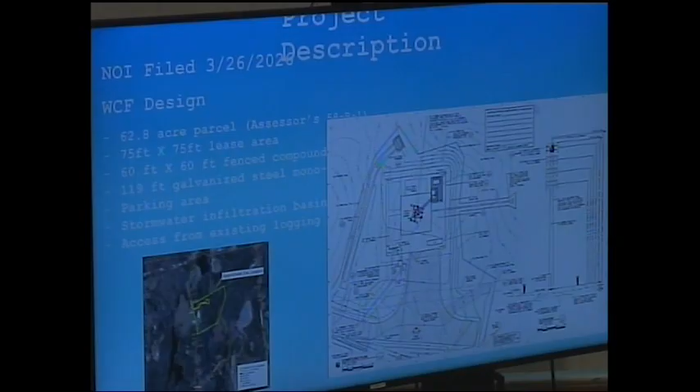Go back, sorry, looks like the spacing's all messed up here, but you should have had this NOI filed a couple weeks ago on the 26th of March. It is for an approximately 63-acre parcel, assessors number 58B1, proposing a wireless communication facility located within a 75 by 75 foot lease area.

It will contain a 60-foot by 60-foot fenced compound area with a security fence with a 2-foot barbed wire topping. Inside that compound area will be about a 119, 120 foot tall galvanized steel monopole structure with the wireless communication antennas. The compound area will also include parking area, a stormwater basin, and access into the property in the lower corner here along an approximately 990-foot existing logging road that we're going to utilize to get into the proposed site.

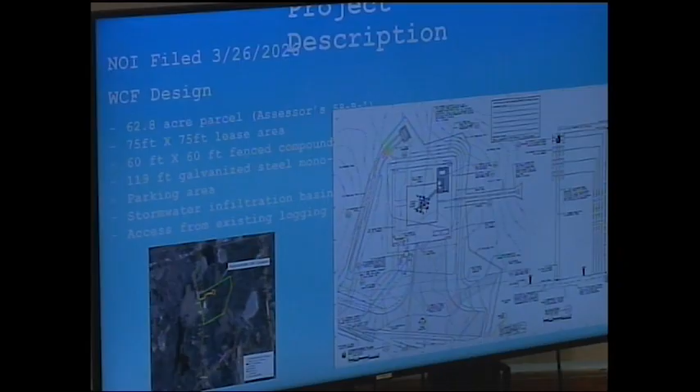Yeah, it'll be widened to about 12 feet, and then the surface will be prepared in order to handle construction equipment and access for maintenance and operation during the life of the facility. So there'll be some minor grading, but not significant amounts.

What is the expected life of the facility? Well, that's a question I've never been asked in doing this for 30 years. I would imagine 50 to 100 years. It's a galvanized steel tower that has a pretty significant concrete foundation.

It's a buffer zone only project, no impacts to resource areas, only buffer zone impacts.

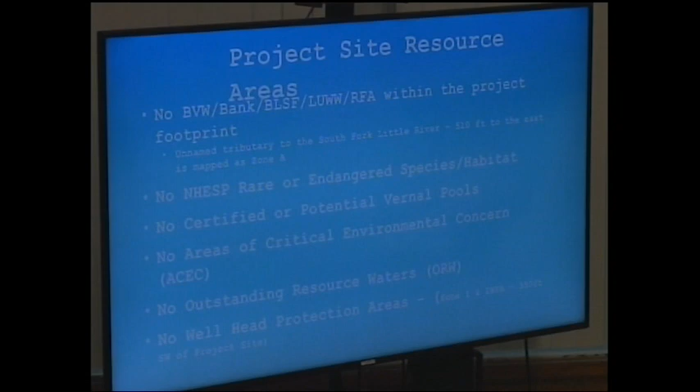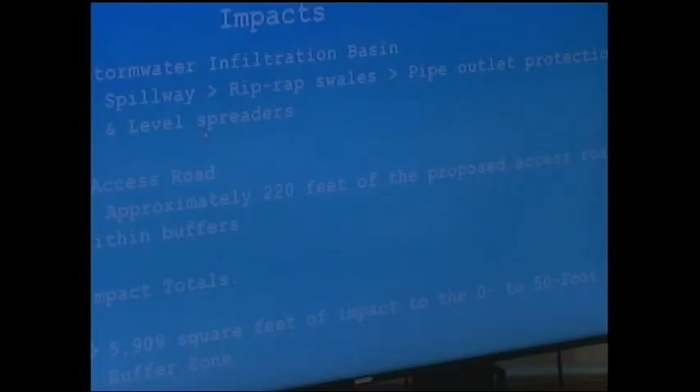Stormwater basin involves spillway, riprap swales, and pipe outlet protection, and a series of level spreaders to diffuse that potential outflow. That's the main infiltration basin impacts, and then of that 990 feet of access road that we're going to be using, the existing logging road, about 220 feet of that is within the buffers.

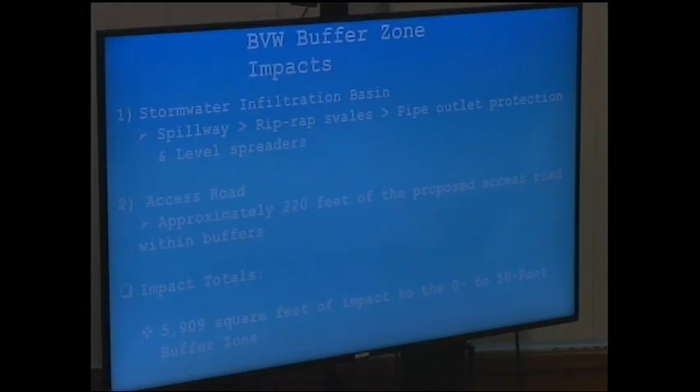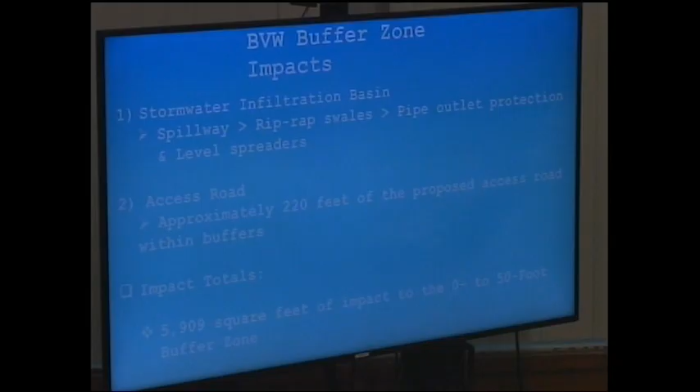So our total BVW impacts for the project, a little shy of 6,000 square feet, 5,909 in the 0 to 50-foot buffer, and 6,492 feet in the 50 to 100-foot buffer.

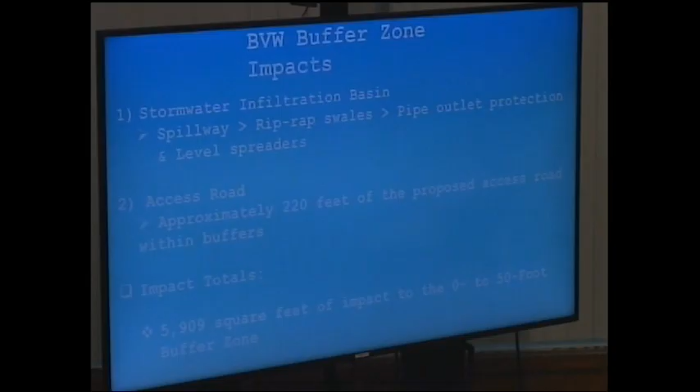What is the total amount of disturbance for the project? Total area is about 64,000 square feet, so it's over an acre. For the grading, that includes the access road and the actual compound facility, preparation for the stormwater basin, and the parking area associated with it.

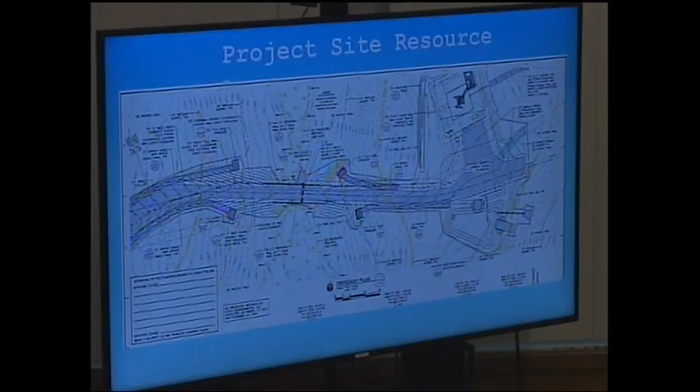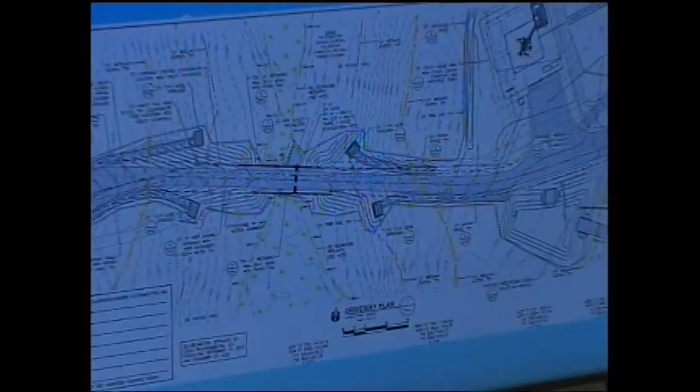Here's a quick site plan. Again, green area is the wetlands, red is the 50-foot buffer, yellow is the 100-foot buffer. So we have a section of access road in here that's in both sets of buffers. We were able to squeeze the road in between the delineated wetland, again on the existing surface.

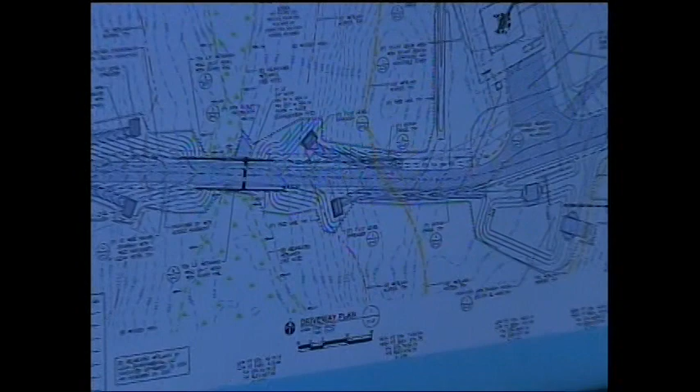Also some impacts over here related to the stormwater basin. This is the spillway outflow and level spreader, and then the overflow or outflow pipe and spreader here fall within the 50 to 100-foot buffer zone.

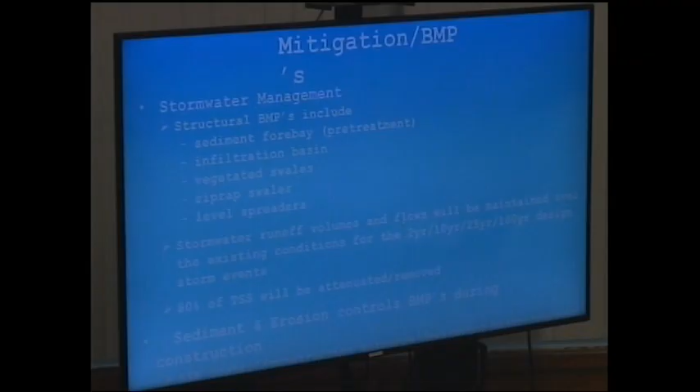Stormwater management includes a sediment forebay for pretreatment, again the infiltration basin. We have vegetated swales, primarily at the beginning of the access road. Also riprap swales and level spreaders to try to diffuse that flow out of the various BMPs that we have in place.

Just looking at some of the planning department dialogue that's been going back and forth, it looks like they're asking for some water bars as well on the road surface. I didn't have that in here, but I caught that today, that they're asking for water bars to minimize erosion on the access road.

Design stormwater runoff volumes and flows will be maintained for the 2, 10, 25, and 100-year design storm events. In fact, it even goes down ever so slightly for the 100-year event. We're compliant there. We've also designed the system to attenuate 80% of the total suspended solids.

And then we'll have a full set of sediment and erosion controls during construction as well. Sediment fences, wattles, construction entrance, dewatering basins, concrete washouts—pretty typical of what you'll see during a construction operation.

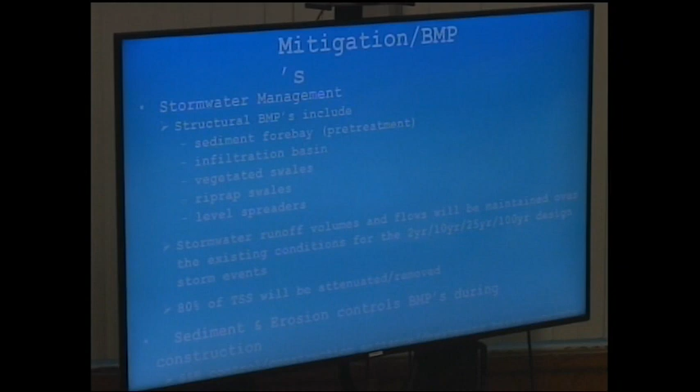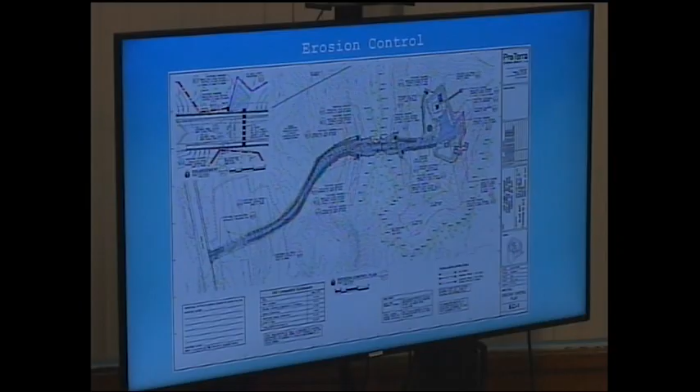Here's a quick schematic of that erosion control. We've put in a little bit extra right along the crossing area for the wetland in order to make sure that we're protecting that resource. Down here, the green is silt fence, and the various colors are a combination of armored fence or silt socks. In some spots, we've double spaced it where we feel we need additional protection due to either gradient or proximity to the regulated resource.

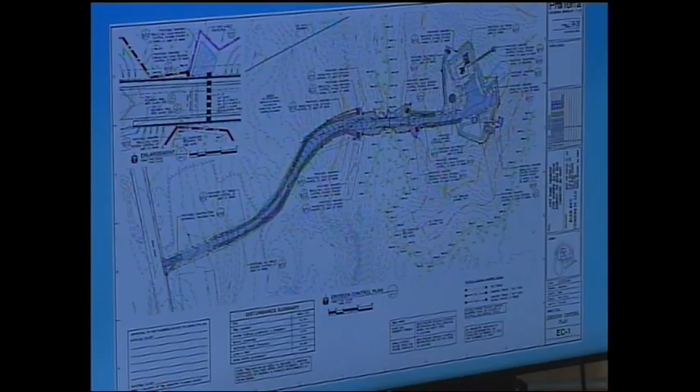Just to summarize, the project's going to enhance wireless service coverage for the public, also emergency services and municipal capacity. Again, we have no permanent or temporary impacts to regulated resource areas.

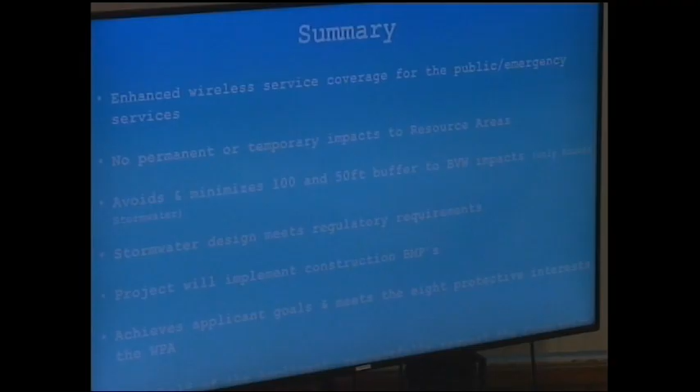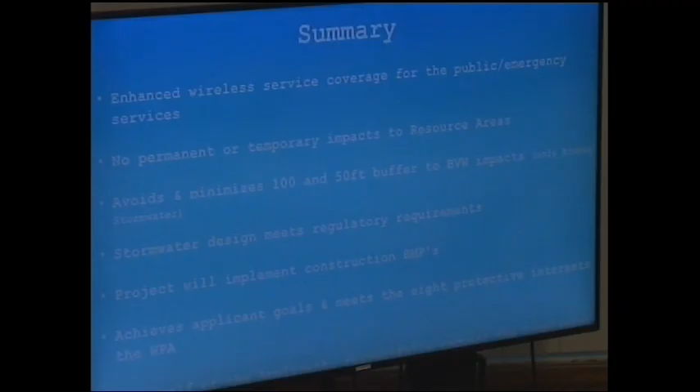We worked to avoid and minimize the 100 and 50-foot buffer to BVW impacts. They are only related to the access road and the stormwater infiltration basin, reutilizing the existing road to minimize additional tree clearing. The site's fairly logged already, so the amount of tree clearing will be fairly minimal—it'll be more grubbing of the stumps already there from previous logging operations.

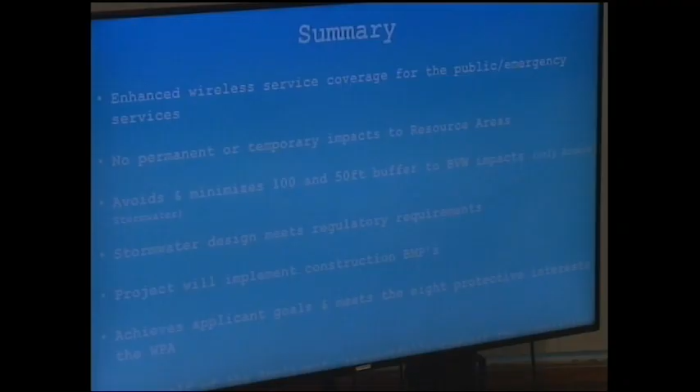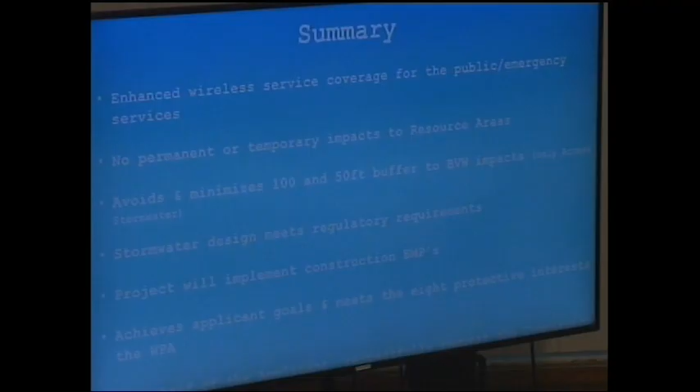We meet the regulatory requirements for stormwater. We'll implement those construction BMPs and maintain them during construction as needed. The project will achieve the applicant's goals, and we feel it meets the 8 protective interests of the Wetlands Protection Act.

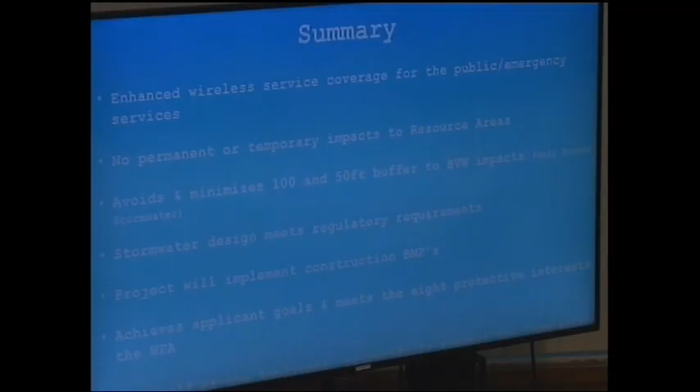On behalf of Blue Sky Towers, we respectfully request the commission to approve and issue an order of conditions for the proposed project. At this point, I will take any questions, any discussion.

So, you are still in front of the planning board and being peer reviewed by Graves Engineering, is that correct? Yes, correct. In disturbing more than an acre, you also trigger our stormwater rules and regulations, so the project will require filing a land disturbance permit application.

Yep, we're prepared for that, so we don't overlap or request additional peer review. We waited until peer review is completed by the planning board, and my understanding is that has not been completed yet. We still don't have a DEP number, so we wouldn't be able to proceed. We're going to continue it here, we would have to continue anyway.

So the way I work is in combination with the planning board. When I receive the peer review and most of the comments have been addressed, and I know the next hearing will be closed, that's when I will approach you and say it's time to file for a land disturbance application, because all the stormwater that's been peer reviewed is what I'm requesting on my application. So in order to avoid you doing double work...

Understood, I already have all that submitted, so all you need to do is submit the latest revised stormwater drainage plan, and then it's just a matter of putting it in the newspapers and waiting 7 business days. I have 30 days to either deny, accept, or issue the order, and we work in conjunction with the order conditions. I won't hold the order conditions until the land disturbance is permitted.

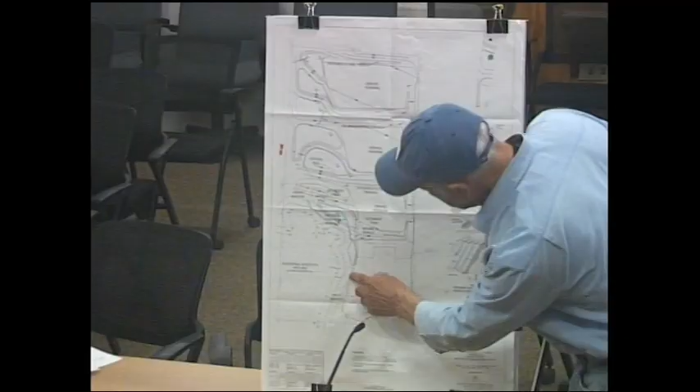So as we're facing the site, as we come into the parking where cars are presently parked, existing parking area, this is wetland flag number 9, and there's check dams in here. That's in your report. Those check dams, there was approximately 1 inch of silt down there. He said, I better get my shovel. We went over there. There was 1 inch and less of silt in a 20 square foot area. I went there on Saturday.

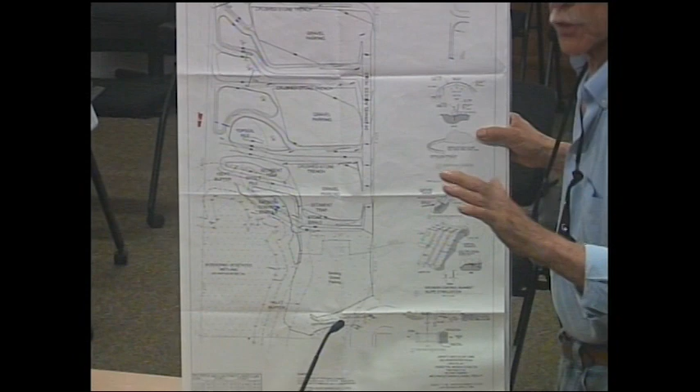I scraped it up with a hoe, a small hoe, put most of it in a pile as an example, to get it down to the A horizon. Don't leave any silt behind. So I pulled it to the side. And on the 14th, I believe, as I have in my report, Chesler went and scraped up the rest of it and took it out of there.

Just a sec, so you understand, that was the result from the stormwater runoff that impacted the resource area. So when Glenn's talking about it, he was cleaning up the sediments that entered the resource area.

His wife is? Mr. Proudy's wife has a medical problem. We hope the best for her, of course.

So just to pass it around, this is the area directly upgrade of wetland flag 9. You'll see a blue flag in the back, and there's check dams that have to do with it, just pass it around quickly for convenience. So that has been an area where the Cheslers originally got into the site, made sure to put check dams, dug a trench, and you see it in there, and then did check dams, and then finally you get to wetland flag 9.

That was the main area where any sediment was going in, and that's where Mr. Allen had viewed that approximately 1 inch depth of sediment in a 20 square foot area. So that's been removed down to the proper horizon. We're seeding that with a shade tolerant seed mix, wetland seed mix. There's some sedges and rushes in that. But the surface is still the duff, so it's not exposed, so we're not worried about erosion in there.

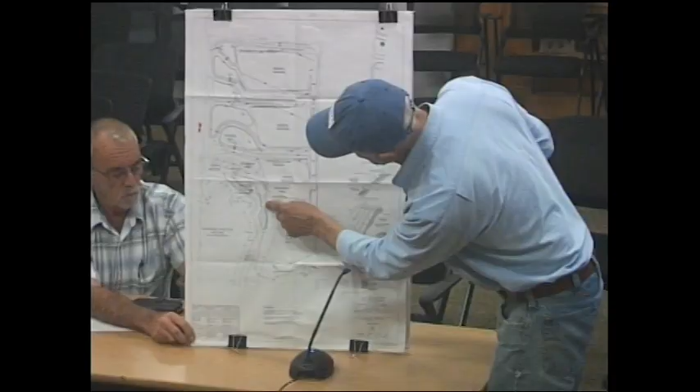And as we move on to other areas, then there was an area up - so that's 9. Water came off this corner. Here's the buffer zone, the extent of the area in the buffer zone. This has all been crushed stone, fabric. The crushed stone, so this is in tiers as you climb up the hill. The Cheslers did fabric and stone this. It's stable, rightly so.

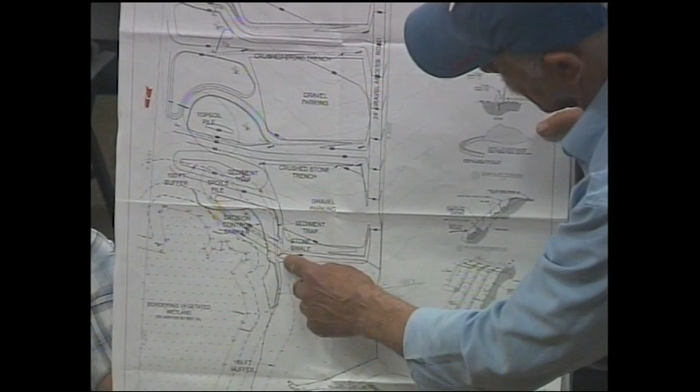ConCom had stopped us from doing anything in the buffer zone because there was no paperwork on this one corner. This is still dirt, this one piece, there's the edge of the buffer zone if you can see it. There's also trenches and sediment areas going along the edge here, and eventually those you see in that picture are here, and that's where the material came out.

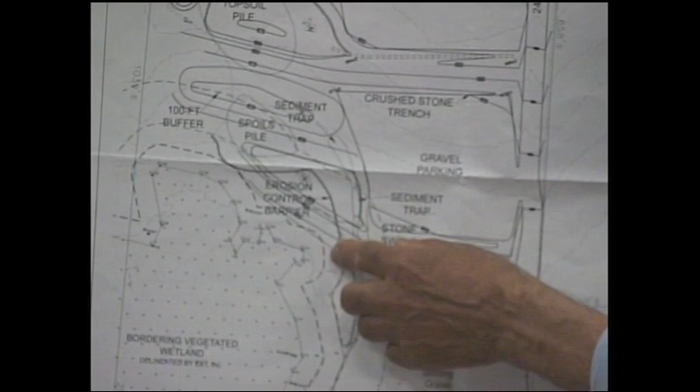This area, there was another place where the erosion control barrier, silt fence, and wattles were not tight to the ground, and sediment went into the buffer zone, but not into the wetland.

That's upgradient of wetland flag 13. Mr. Baker and Mr. Proudy went up there today and noted on the plan where these areas are, the other ones that Mr. Allen flagged.

Where's my paper? Oh, it's right here, Glenn. Do you want your notes back? Yes, there you go. Thank you for the pictures. We didn't repair anything today, we just took pictures and noted it for the engineers to put on a plan. Thank you, Mr. Baker. So go on into the rest of it.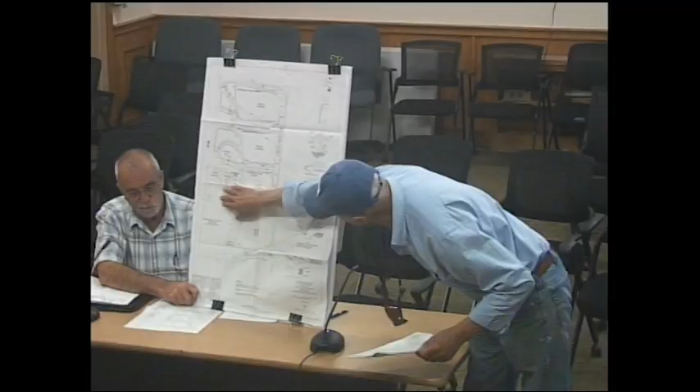Mr. Baker, the day after the site inspection, extended silt fence and removed sedimentation. This would be up gradient along this edge, where the wetland is. This is a headwater wetland, so it drains this way. There's an old cart road, and then there's a pond down below held by beaver, so this is a drainage divide. Water drains either that way or this way, goes down towards 20. It's an upper headwater wetland system, not a lot of flow through because it's headwater.

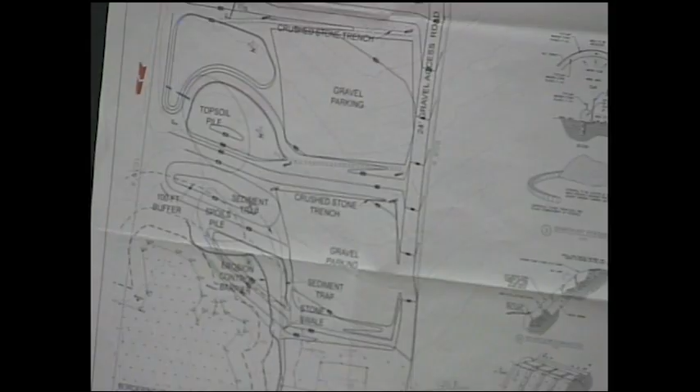Now, number 3, the small sediment basin on the west side of the site should be reinforced by extending berms and erosion control to settle out runoff.

Have you looked at this since they've done the repair work? No, our alley is the one who's monitoring the site. So those were his comments, and Glenn is responding to his comments, what has been and has not been done. So he sent this report over, and I feel he just wants to finalize what was done.

We're ready for inspection. Our alley has a comment on it, and his response that just came in was: thanks Glenn, I remain concerned about the unstabilized buffer slopes and the exposed soils on the larger site. I will plan to inspect following the next significant rain event.

I guess what he wants to see is that if we do have a significant rain event, the upgrading worked. We've had rain events, we had the melt and the rain event. This is all we had for sediment going in.

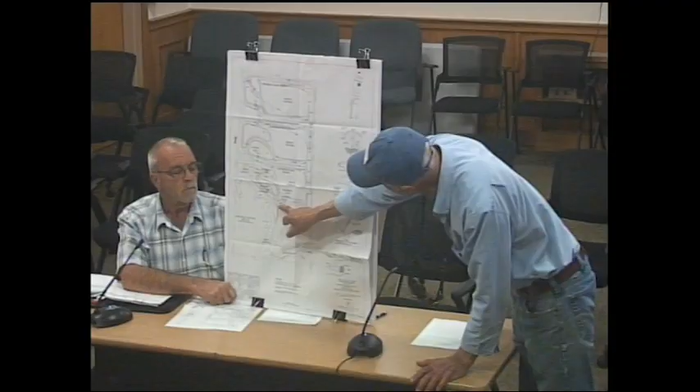We have more erosion controls now, and we're gonna be asking tonight if we can finish fabricing and stoning just this corner. We also have in this report that Topper Land Surveying is wrapping up and working on the stormwater report. They'll have it by the end of the month, and we'll have this thing filed by the end of the month or the first week of May coming up.

But in the meantime, if we stabilize that one corner where there is still some issues with sediment movement, but it's being caught by sediment controls down gradient, then we can finish that whole lower tier as far as the slope going down. That one corner is the only one that keeps coming up.

So what Art Allen said, our alley, looked at what they've done up to today. He's concerned with the slope stabilization, which is in that area.

He recommended at the site that it be stabilized, but it was up to the commission's decision, the commission to say yes, you can stabilize that one corner of the buffer zone.

That's why we asked for that in my final letter here, asking if we could just finish that corner off, and in the meantime Topo would finish the plan, the stormwater will be done. And then we'll have the notice at the beginning of May for you.

Okay, I think you should. So, anybody have a question?

Can I just explain? So, yeah, so the stabilization he's proposing, it was proposed in the past, is within the buffer zone. And there is an enforcement order that was issued to them, correct?

So usually we issue enforcement orders to fix what the work was done. So what they're proposing is finalizing the grade and the final construction of that slope, which usually is not work that we approve on an enforcement order. It has to be under order conditions, like an after-the-fact notice of intent. A lot of people do work, they don't know their buffer, and we request an after-the-fact notice of intent. So clearly at this point, the priority we all want is that slope to be stabilized to avoid any more sedimentation going to the buffer zone.